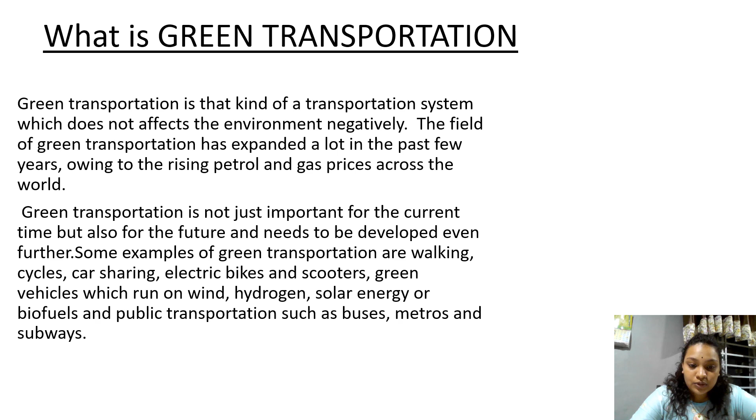What is green transportation? Green transportation is that kind of transportation system which does not affect the environment negatively. The field of green transportation has expanded a lot in the past few years owing to rising petrol and gas prices across the world. Green transportation is not just important for the current time but also for the future and needs to be developed even further. Some examples of green transportation are walking, cycles, car sharing, electric bikes and scooters, green vehicles which run on wind, hydrogen, solar energy and biofuels, and public transportation such as buses, metros and subways.

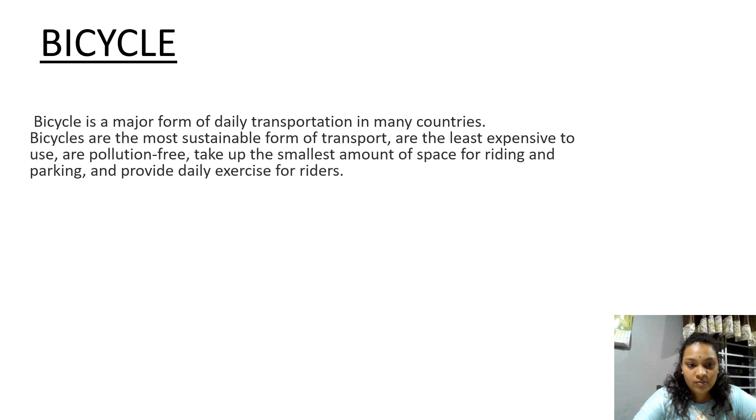Although walking is a great green transportation mode, a bicycle has far-reaching benefits because it's faster plus it's in itself a form of workout. You can buy a bicycle at really reasonable prices these days. Buying and maintenance cost is only a fraction of that required for a car.

An e-bike is as much as 6 times more efficient than riding a train. In addition to being a greener transportation option, they also offer more freedom of movement without schedule restriction and the ability to travel alone if desired.

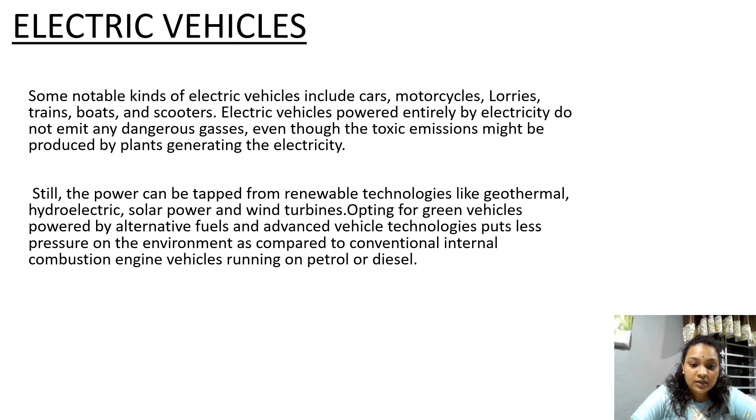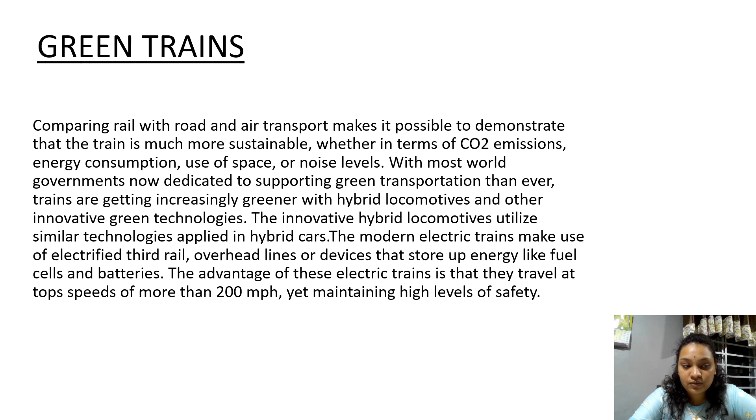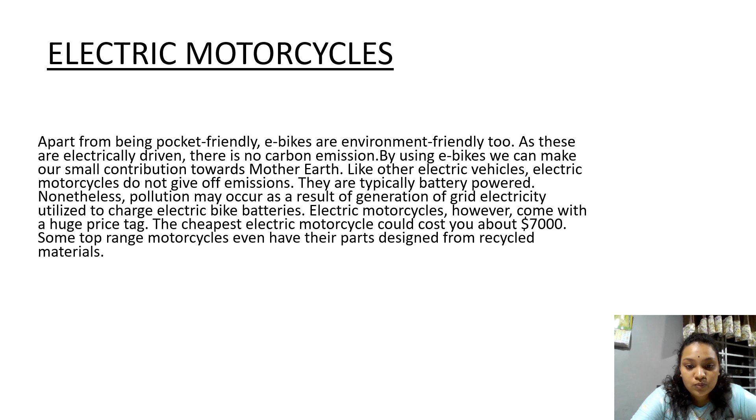Like other electric vehicles, electric motorcycles do not give off emissions. They are typically battery-powered. Nonetheless, pollution may occur as a result of generation of grid electricity utilized to charge electric bikes' batteries. Electric motorcycles, however, come with a huge price tag. The cheapest electric motorcycle could cost you about $7,000. Some top-range motorcycles even have their parts designed from recycled materials.

Service and freight vehicles. These kinds of vehicles attribute to about 9% of the total toxic gas emission. Utilizing electricity and biofuels instead of regular fossil fuel resources in services and freight vehicles, administering travel demands and offering lots of travel alternatives will go a long way towards aligning the transportation sector to conform to green transportation.

Multiple occupant vehicles. The explosion of vehicles around the world has been due to the booming world economy. While this is a milestone many are happy about, pollution levels have significantly increased.

Multiple occupant vehicles, also referred to as carpools, reduce the number of vehicles on the road, hence minimizing the level of pollution. They are very eco-friendly and a favorable mode of green transportation.

A group of friends and colleagues can make use of one vehicle when habitually driving in a similar direction. Instead of five individuals driving their own cars in the same direction, it's a lot more economical, saves money and fuel, and is ecologically sensible to use a single car to take everyone to their destination. Definitely a great way to save petrol and money.

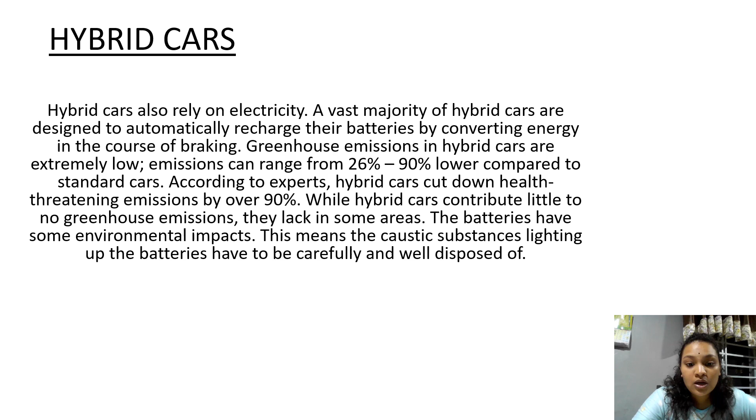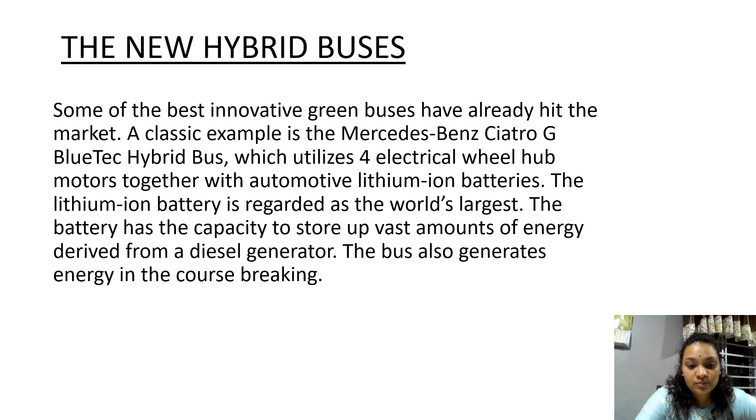Pedestrian - one of the best ways to get to school, to work, and to go grocery shopping. Walking produces zero emission of any greenhouse gas. It is free, an additional plus, and a good form of exercise for the body.

The Renewable City Strategy is a vision for the future of Vancouver where we rely 100% on renewable energy to power our city before 2050.

Transportation uses a quarter of the energy that's used in the city of Vancouver. So we really want to reduce the amount of energy used in transportation and ultimately increase the amount of renewable energy that we use.

A complete compact community is the kind of place where people can live close to where they work and play, and have options to get around - walking, cycling, taking transit. By opening up these choices to people and reducing the distances people have to travel, we can reduce our use of fossil fuels.

Living in this neighborhood near Commercial Drive has been life-changing. Everything is at my fingertips - schools, grocery stores, restaurants, the community center, and there's the beach. So I can have anything I want just a few blocks away from me.

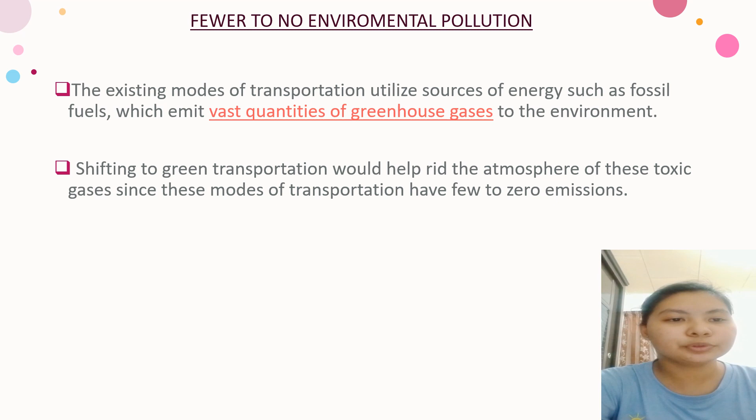Fewer to no environmental pollution: the existing modes of transportation utilize sources of energy such as fossil fuel, which emit vast quantities of greenhouse gas to the environment. Switching to green transportation will help rid the atmosphere of this toxic gas, since this mode of transportation has few to zero emissions.

Save your money. Embracing green transportation modes like bicycles, multiple occupant cars, and electric motorcycles will save you a lot of out-of-pocket costs related to buying fossil fuel at the pump.

Contribute to building a sustainable economy. Manufacturing and distribution of green vehicles will go along with improving the existing transport system. This will lead to creation of more jobs in the transport sector, hence minimizing socio-economic disparity and building up a sustainable economy. It will also minimize over-reliance on fossil fuel in the economy.

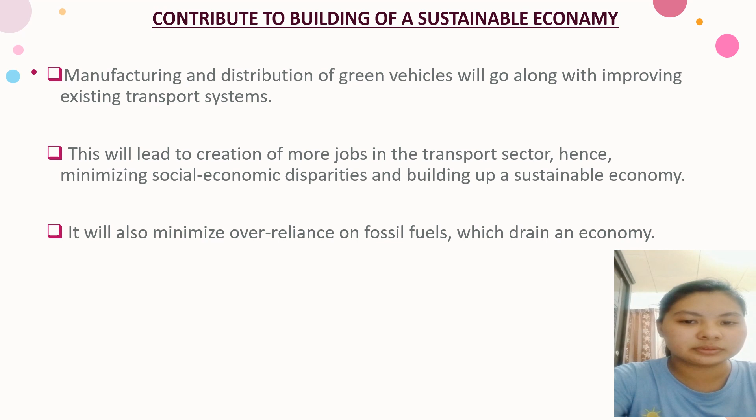Improve health. Energy sources like natural gas, coal, and oil emit toxic gas that negatively affects our health. In fact, these gases have been associated with rising cases of cancer and other cardiovascular diseases. The emissions produced by green vehicles are not harmful to human health, so embracing green transportation will only improve a country's health status.

There are many other benefits associated with green transportation, which will enhance lifestyle and improve quality of human life. It's a daunting task to convince the entire population to change to green transportation, but with significant steps underway, the future of green transportation is nothing but bright.

Apart from this, there are various ways to go green at home. This will not only reduce the consumption of energy but will also save our environment for the future.

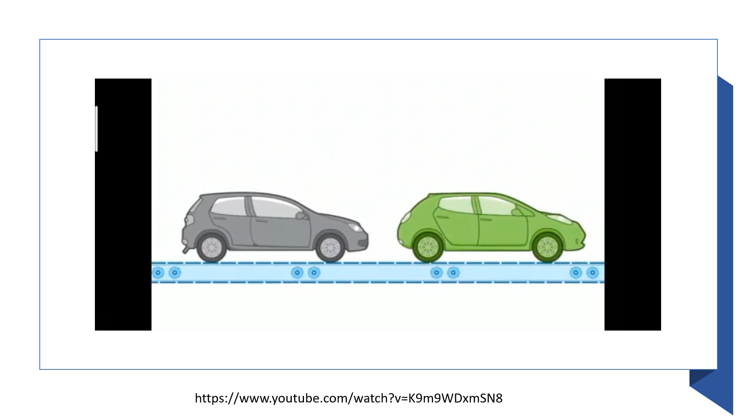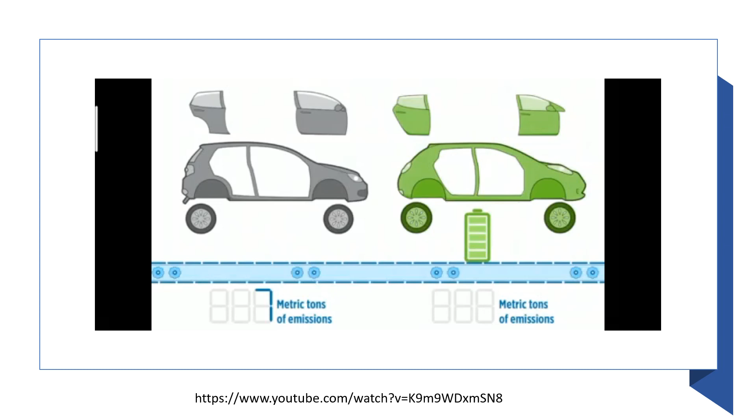Both cars start out on the assembly line with similar parts made of raw materials like steel and aluminum. For a gasoline car, this manufacturing and assembling stage generates about 7 tons of emissions. Battery electric cars, meanwhile, are powered by a large battery. This requires more energy and materials to produce, for an 84-mile range battery electric car bringing its emissions tally up to roughly 8 tons. But what happens when they hit the road?

Gas-powered cars produce pollution with every gallon of gas they burn, with even more emissions coming from extracting, refining, and transporting the fuel to gas stations. Electric cars, on the other hand, run on electricity, which can be much cleaner than gasoline, depending on how the electricity is made.

Two-thirds of Americans live in regions where charging an electric car produces fewer global warming emissions than driving even a 50-mile-per-gallon gasoline car.

By the end of their lives, the average gas car will rack up 57 tons of global warming emissions, compared to 28 tons for a battery electric car. Disposing and recycling each car adds less than 1 ton of emissions.

And remember that electric car battery? It can be recycled or reused. In the final tally, an 84-mile range battery electric car cuts global warming emissions by more than 50% compared with a similar-sized gas-powered car, making up for the battery's manufacturing emissions within 1 year of driving. And as the country adds more and more renewable sources of electricity, driving electric will get even better.

So there you have it, straight from the engineers at the Union of Concerned Scientists. Electric cars: clean and getting cleaner.

Hi Madam. So, transport infrastructure. Green infrastructure concept comprises of the following, but not limited to.

First is reuse of materials. The second is reduced use of materials. The third is new, less carbon intensive materials. The fourth is capacity management, making the best use of available supply of infrastructure, including efficiency in the operation of the system and mode management. And the last one is promoting more efficient forms of transport, including walking and cycling, public transport, and rail, and best available technology.

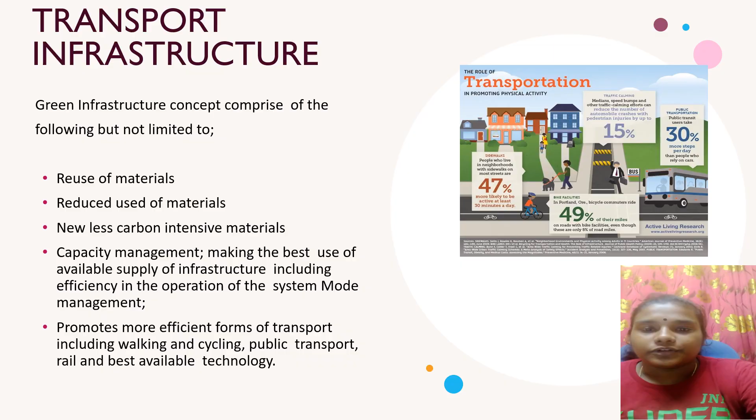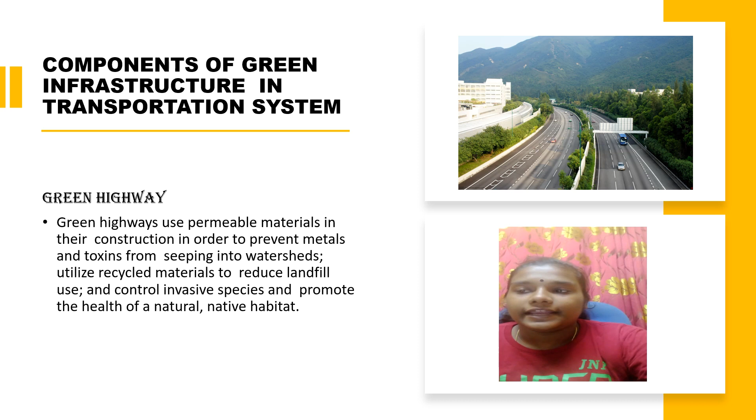Green highway. Green highways use permeable materials in their construction in order to prevent metals and toxins from seeping into watersheds, utilize recycled materials to reduce landfill use, and control invasive species and promote the health of a natural native habitat.

After that is pedestrian bridges or flyovers. Pedestrian bridges and flyovers provide opportunities for alternative environmentally friendly transportation modes such as biking and walking. Walkways over main roads or rivers connect miles of trails on either side of the river, encouraging exercise and clean modes of transportation.

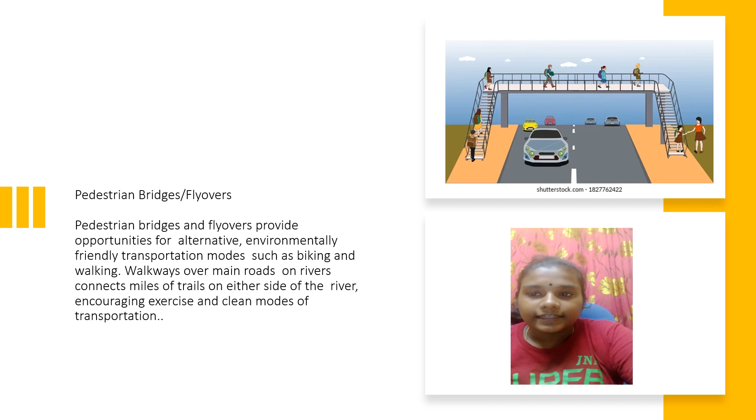Public transportation: the public transport system now includes a number of bus rapid transport (BRTs) in the Klang Valley, Iskandar Malaysia, Penang, Ipoh, Kuantan, Kuching, and Kota Kinabalu, while the MRT has supplemented the extended LRT lines in the Klang Valley to link to Putrajaya.

So after that is green building materials. Recycled granite slabs from a nearby demolition area can be used to create steps in a park. Stone from previous structures can be incorporated to create a variety of seating and walkway features. And steel from warehouses can be reused. All of this is to say that recycled building materials can provide a green boost to any project.

The next one is rail. Rail is another possible replacement for the petrol car. An 8-carriage train. At its maximum speed of 100 mph, or 161 km per hour, it consumes 1.6 kWh per 100 passengers per kilometer if full. In contrast to the eco car and the bicycle, trains manage to achieve outstanding efficiency without traveling slowly and without having a low weight per person. Trains make up for their high speed and heavy frame by exploiting the principle of small frontal area per person.

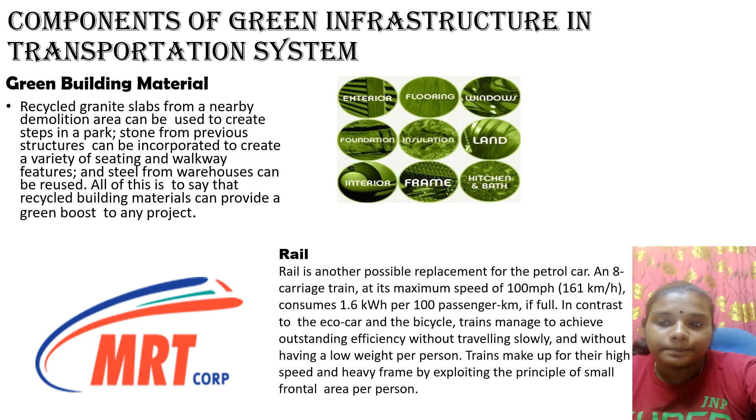So for energy efficient transportation hubs or stations, developed countries have already incorporated energy efficient materials and systems in the design and specification of new stations and transportation hubs. The approach is to work closely with design teams to minimize the operational energy use in stations and set out specifications of vehicles with the aim of minimizing energy use during operation. Harnessing daylight in the design of transportation hubs could eliminate usage of lighting needs during the day. Efforts to reduce embodied carbon in materials through the use of cement substitutes may contribute to greater reduction in carbon footprint in construction projects.

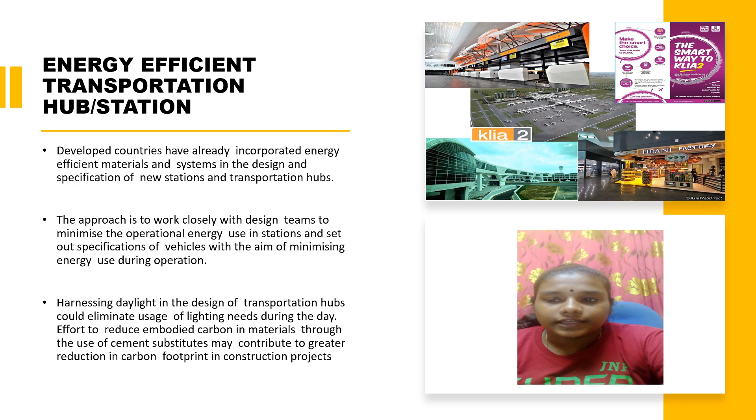For the concept of green vehicle: construction technology and green vehicle components in green vehicle. Car manufacturers have been focusing on gasoline and diesel engine improvement, alternative fuels, and hydrogen, hybrid vehicles, fuel cells, batteries, weight reduction, and recycled material for parts of vehicles. The major technical concerns are achievement of a certain level of energy efficiency and reduction of emission without sacrificing safety and vehicle performance. In addition, the development of manufacturing techniques to reduce the time and cost of vehicles, and integrating recycled material for parts, is another crucial technical challenge.

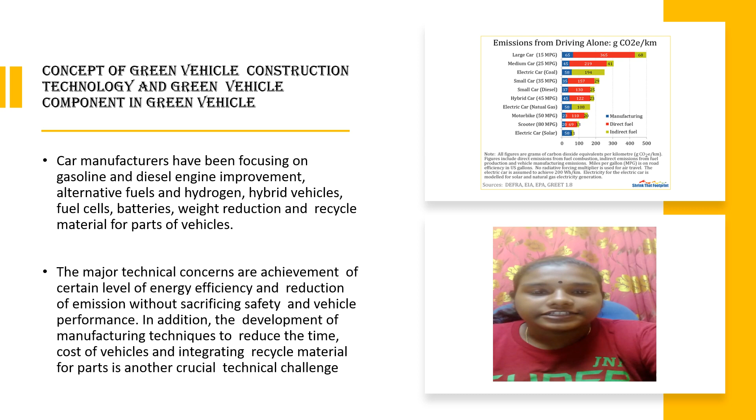Vehicle category: a green vehicle, or clean vehicle, or eco-friendly vehicle, or environmentally friendly vehicle, is a road motor vehicle that produces less harmful impacts to the environment than comparable conventional internal combustion engine vehicles running on gasoline or diesel, or one that uses certain alternative fuels. For example, it complies with European emission standards such as Euro 6, California Zero Emissions Vehicle Standards (ZEV, ULEV, SULEV, and PZEV), and low carbon fuel standards enacted in several countries.

Green vehicles can be powered by alternative fuels and advanced vehicle technologies, and include hybrid electric vehicles, plug-in hybrid electric vehicles, battery electric vehicles, compressed air vehicles, hydrogen and fuel cell vehicles, neat ethanol vehicles, flexible fuel vehicles, natural gas vehicles, clean diesel vehicles, and some sources also include vehicles using blends of biodiesel and ethanol fuel or gasohol.

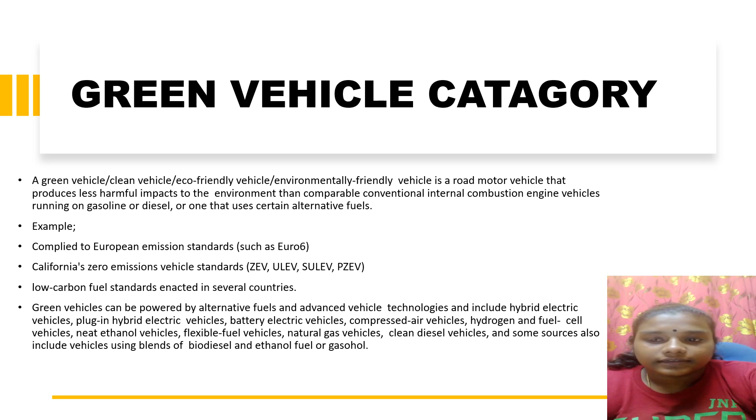For 1401 until 1550 kg, that's 7 liters per 100 km. Segment E is executive car, 1550 to 1800 kg, that's 9.5 liters per 100 km. For the luxury cars, that's segment F, 1801 to 2050 kg, that's 11 liters per 100 km.

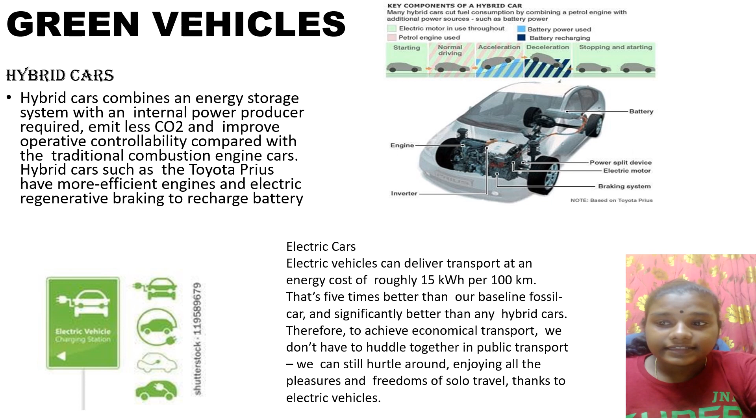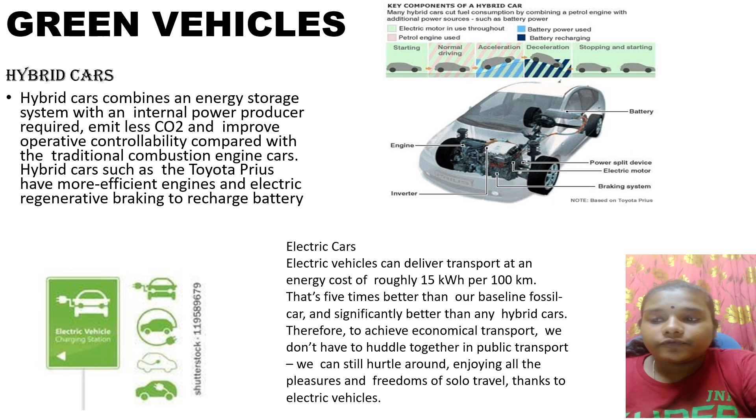After that, the electric cars. Electric vehicles can deliver transport at an energy cost of roughly 15 kWh per 100 km. That's 5 times better than our baseline fossil car and significantly better than any hybrid cars. Therefore, to achieve economical transport, we don't have to huddle together in public transport. We can still hurtle around enjoying all the pleasures and freedom of solo travel, thanks to electric vehicles.

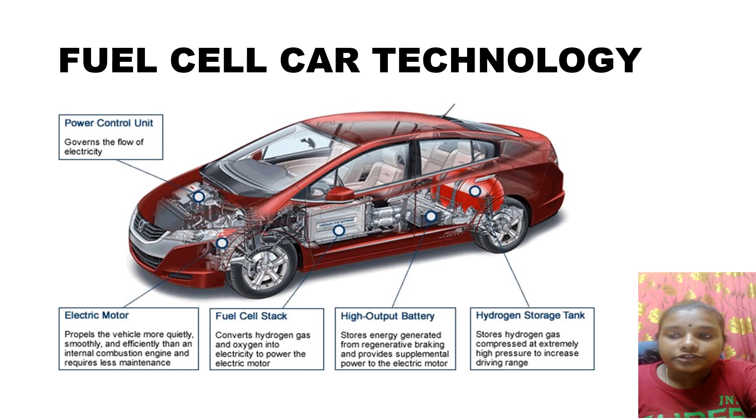After that, the fuel cell stack converts hydrogen gas and oxygen into electricity to power the electric motor. Then the high output battery stores energy generated from regenerative braking and provides supplemental power to the electric motor. After that, the hydrogen storage tank stores hydrogen gas compressed to extremely high pressure to increase driving range.

The concept of green fuel option, the introduction of alternative fuels. The alternative fuels for motor vehicles include liquefied petroleum gas, compressed natural gas, liquefied natural gas, methanol, ethanol, and hydrogen. These fuels are designed to reduce emissions and release lower greenhouse gas emissions compared to conventional fossil fuels.

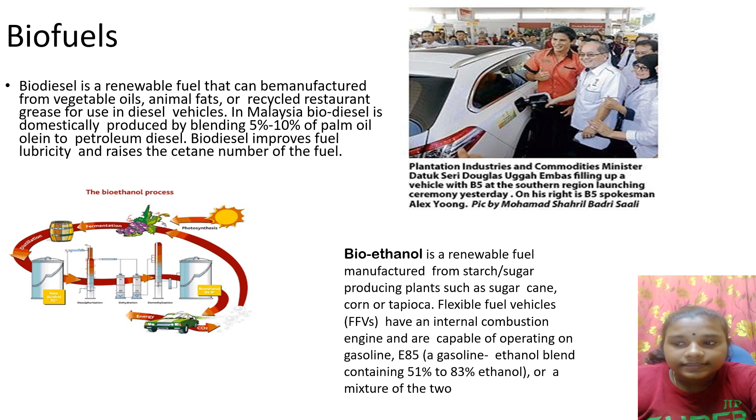Bioethanol is the renewable fuel manufactured from starch or sugar producing plants such as sugarcane, corn, or tapioca. Flexible fuel vehicles (FFVs) have an internal combustion engine and are capable of operating on gasoline, E85 (a gasoline-ethanol blend containing 51% to 83% ethanol), or a mixture of the two.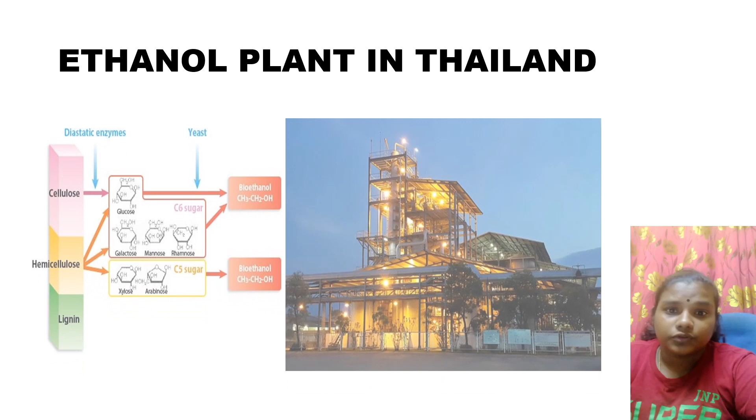So this is the ethanol plant in Thailand.

For hydrogen fuel, about 50% of the global population lives in areas where air pollution levels are high enough to negatively impact public health and the environment. Hydrogen powered fuel cell vehicles emit none of these harmful substances. Their only emission is H2O, that's water, and warm air.

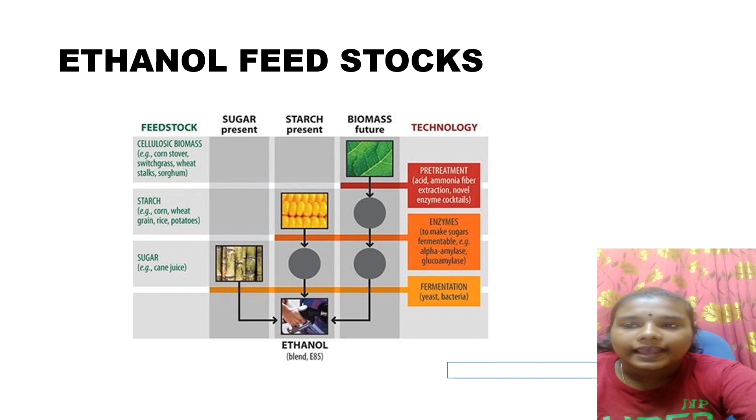The ethanol feedstocks: cellulosic biomass, for example corn stover, switchgrass, wheat stalks, and sorghum. That is sugar present, starch present, biomass future technologies. Pretreatment: acid, ammonia fiber, and novel enzyme cocktails.

The efficient forms of transport include walking and cycling, public transport, rail, and best available technology. Green transport equals infrastructure plus services plus fuel plus technology plus attitude. That's all from me. Thank you.